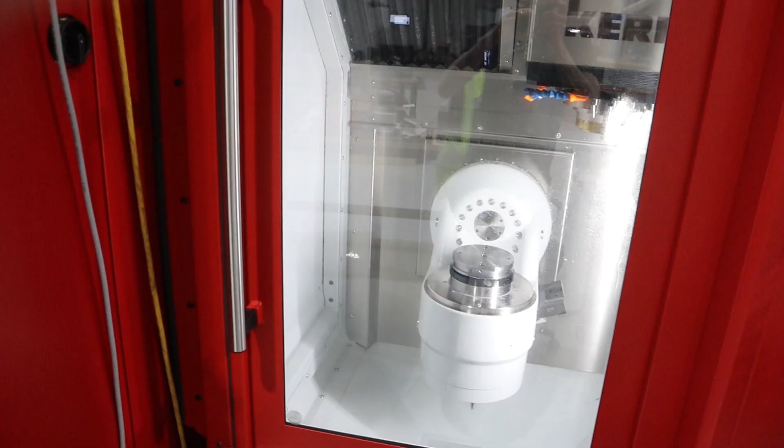So let's change the pallet. Got the one pallet on there. Got a whole bunch of pallets lined up in here. This pallet changer is a game changer, literally. It just changes the way that I think about work.

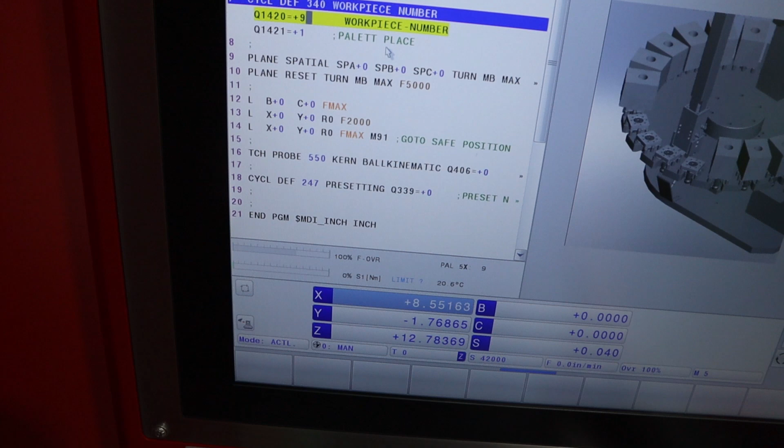So, okay, so I need pallet 12. This guy is pallet 9, but I don't really care what it is necessarily. So I'm gonna go here. I've already warmed up the machine. I'm gonna go workpiece number. I'm gonna push over, push 12 and end. That's it. And then cycle start. Double check. Okay, it is pallet 12 that I want. And then cycle start.

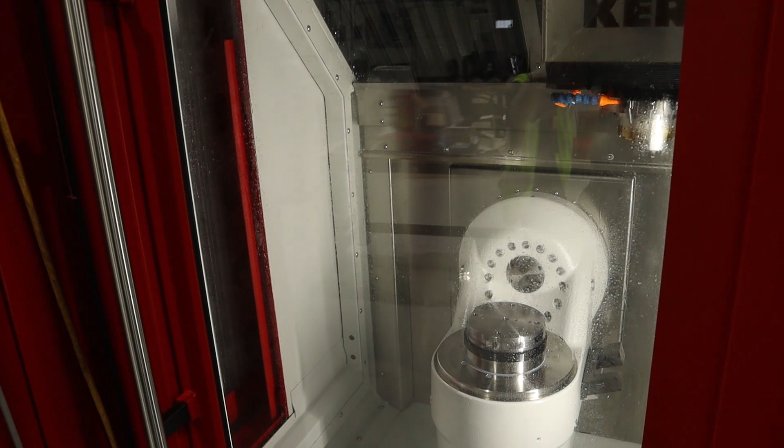So I've already homed and warmed up the machine. I've homed the robot. Oh, it's so gentle. I love it. Notice the air that comes up out of there. Here we go. Oh yeah. Down one, yep. Gently grab that sucker.

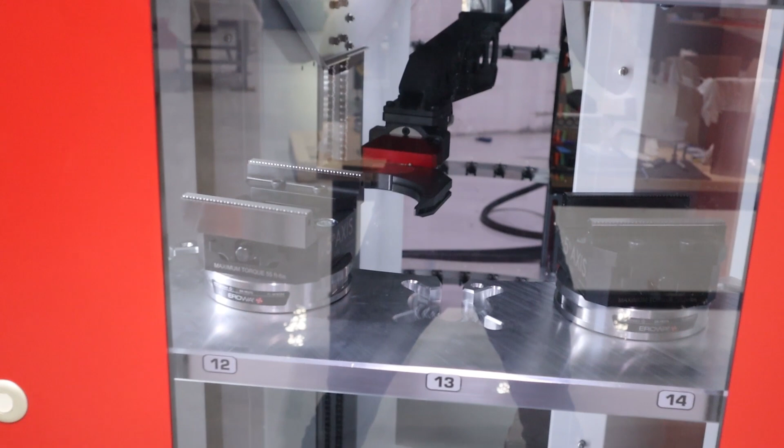There are little gripper fingers, I think, pretty sure, that actually pinch the pallet. Oh yeah. And there's a rubber seal around the outside, that black underneath. And then the door closes and the C will orient forward. And then I know we're done. And I can open the door.

All right. So now we're gonna grab that same pallet. I'm gonna open the pallet door. What did we say it was, 9? So now I need two hands for this, but I'm gonna grab it, lift it upside down, and put it in that vise.

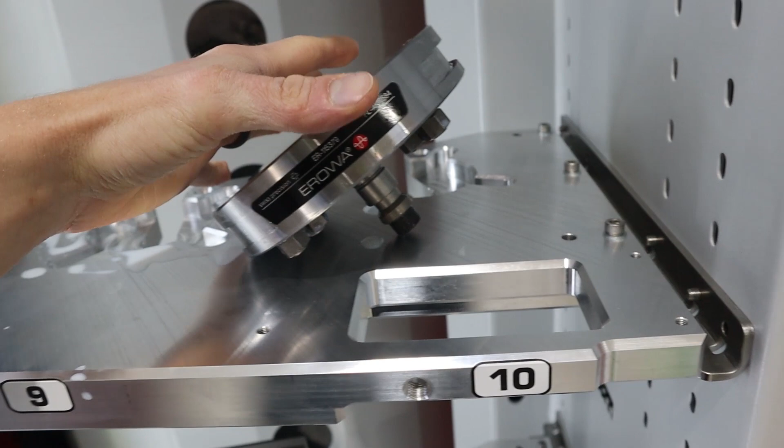So I just noticed something interesting as I lifted it up. A decent amount of coolant dripped out, just because it's in there. So I'm curious how clean this is going to be after lots of production. I mean, it's very accessible, I can clean it, I can get in there. We could spray it down and wipe it often. I'm curious how nasty it's going to get over time.

So we've got to watch that. Like, if this one drips, it's going to drip onto the one below it. Just things to think about. Maybe it's not a big deal, but something I noticed. I mean, it's been spotlessly clean this entire time, so I'm starting to see this.

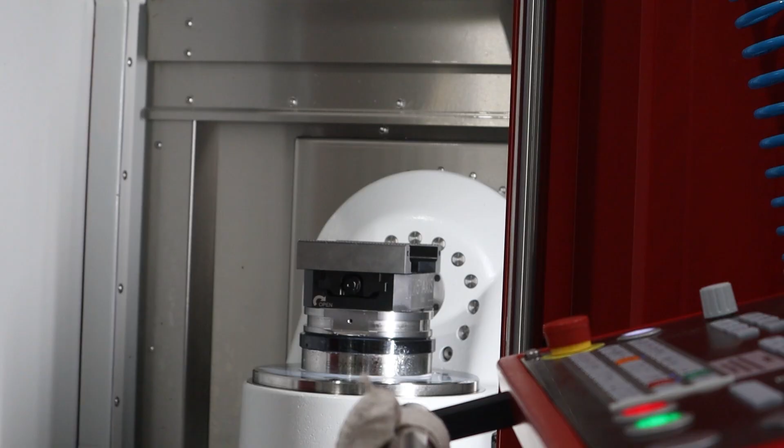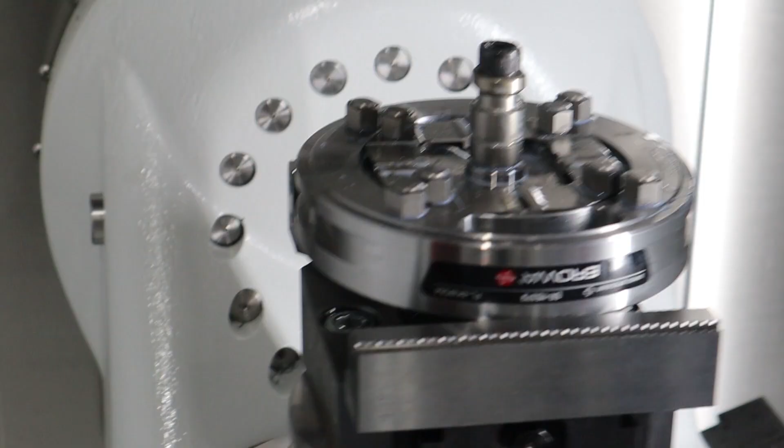So it's not tight yet, but that's kind of what I'm thinking. I was going to mount it lower on the cap head screws, but I was feeling weird about that because there's no way they're all the same height, meaning the pallet is then going to be a little crooked. But then I realized I can do it on this shelf right here. Like you see on this side, there's a shelf with grippers. I can do it on this side, and I still have enough gripping room there.

And then on this side of the pallet, there's a flat. So this flat area kind of orients the pallet, makes sure that we're in the right orientation, the right rotation, and then I need to probe it because there's no way I'm going to be able to guess perfectly center left to right. So we'll come in, maybe pull out the pull stud, and then probe this boss or something. Or actually, we could probe the outside of the pallet. Maybe I'll just do that. But this has got to be out of the way anyway, I think, because well, I could probably clear it.

I'm doing a countersink there, and there, and there, and there. I don't know, we'll see. I should probably remove that, but I might not have to. You can see how much it's sticking up.

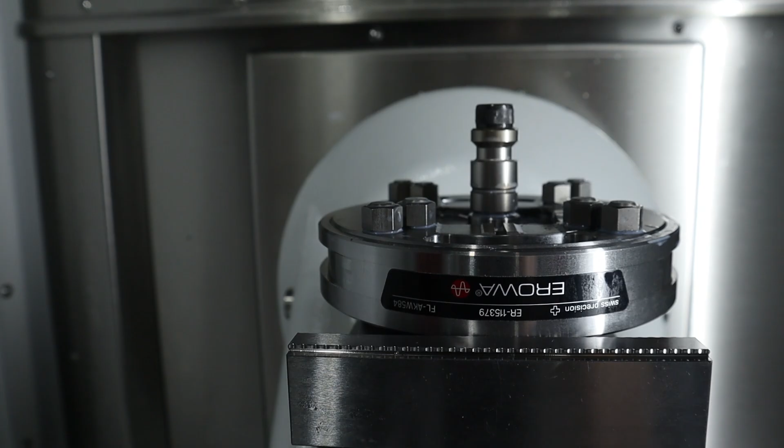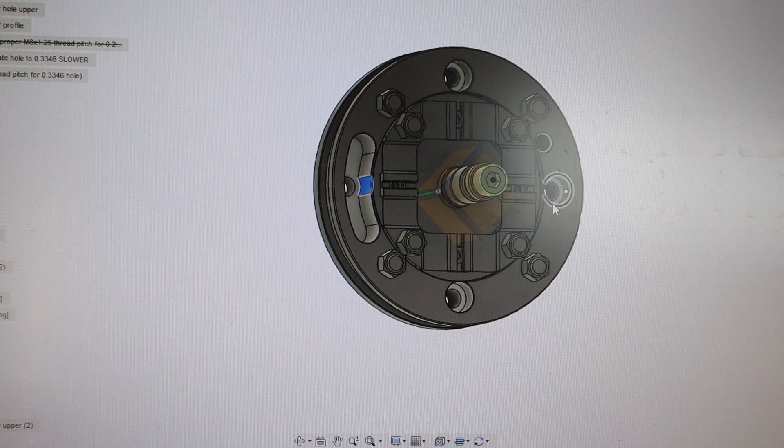So you can see here in Fusion what we're doing. We're putting in this guy. For those, the pallets have this weird arch thing. Maybe it's got a purpose, I don't know yet. But they all have that in it, so one of the heads is going to be shorter and go right there. But yeah, the other three. So real quick, check this out. Here's my setup, right?

According to the model, this chamfer will not allow the grippers to grip onto anything. You would never clamp like this because it's got nothing to bite into. But in real life, it actually works.

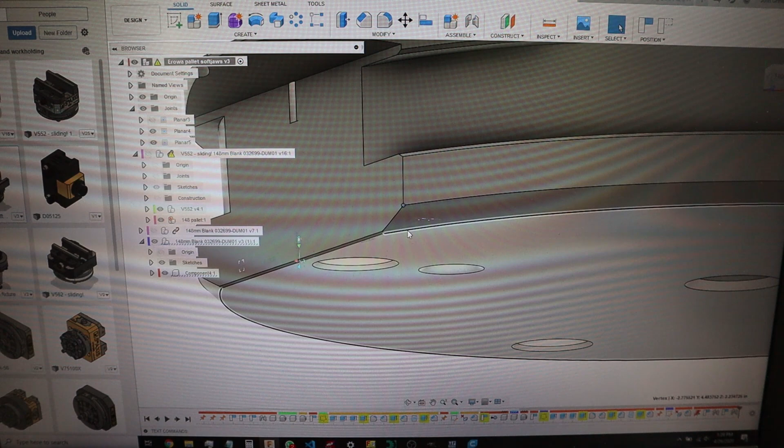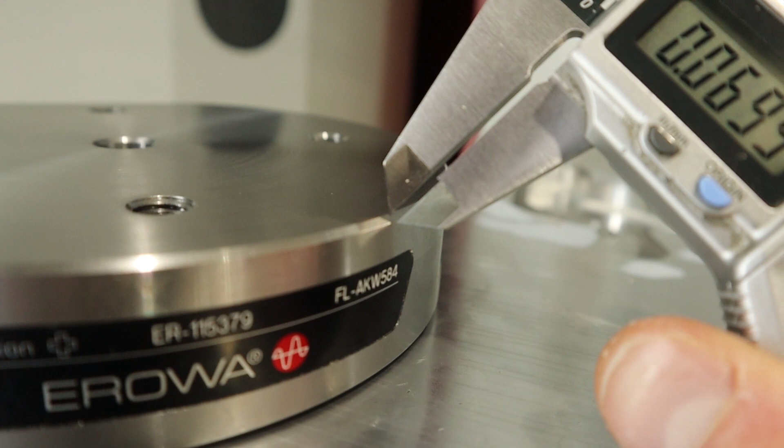If I hide that, and measure shift-click from the point to there, I get down here roughly 0.154 inches. So my chamfer across the angle is 0.154. However, when I look at my actual pallets and quick and dirty measure one of these - this isn't accurate, but I've got about 70 thou. So the actual chamfer is about half what the computer thinks it is.

That's interesting, so I'm going to actually look at this guy. This one has a big chamfer. I bet that one's even bigger. So the model that I downloaded is more like that one. However, if all the ones I'm using have this smaller chamfer, I've got to update my model to match, just so that it's right. Because otherwise I'll think an operation like I'm trying to do right now ain't gonna work, and I can't be thinking that, because it does work.

Much better, look at that. Yeah, that's exactly what I've got in real life. That'll grip perfectly. So I've got some joints set up.

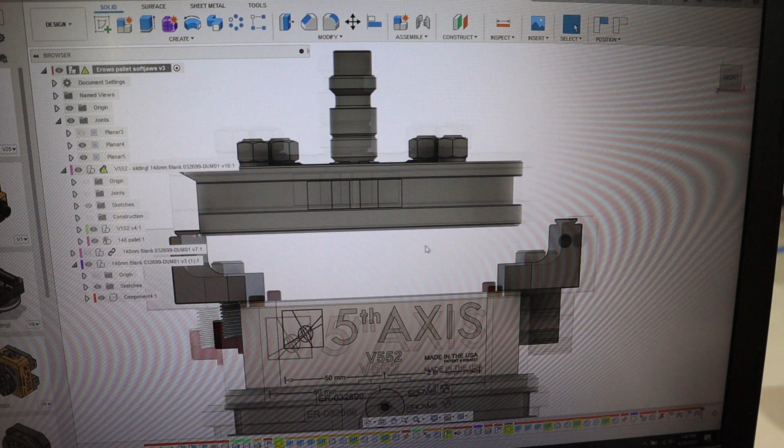I've been playing more with joints and trying to understand them better. So I've got some joints set up over here so that the model will track the flat side, you know, right there.

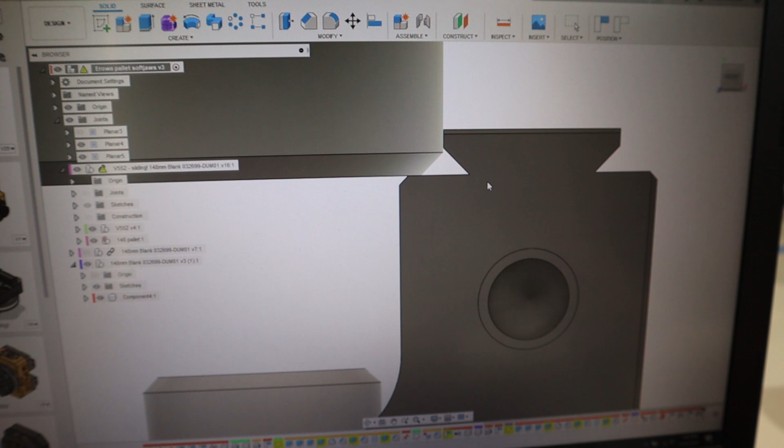And the vise is jointed together so that, normally the vise is like this, but you just kind of flip it that way. Then I just move it to position here, and if I want, I can lock it down or just not touch it. And I still have to move it this way. So I've got a few joints in different axes right now.

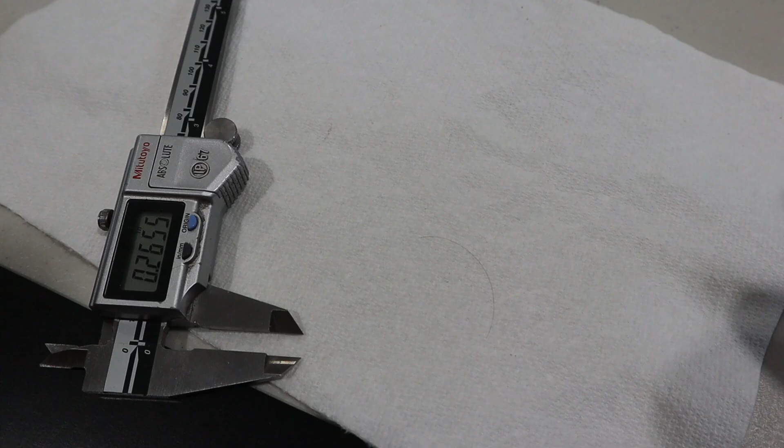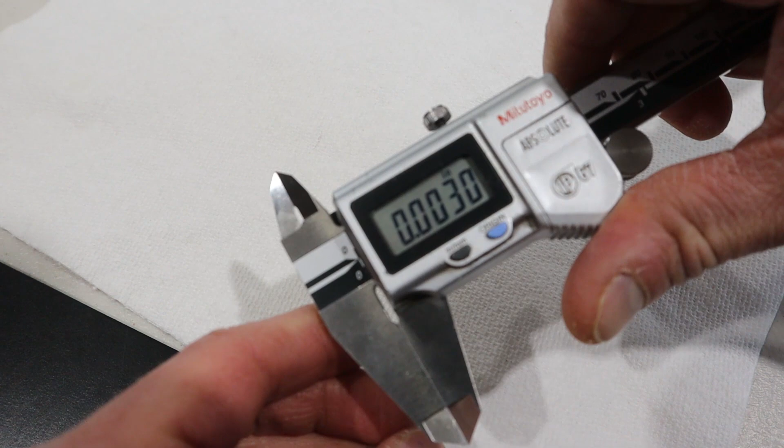Here's a goofy little side thing for you. I was just walking around the table here and I noticed one of my hairs on the table with the calipers literally right next to it. So instead of trying to pick up the hair, I just took the calipers and picked it up. And then I figured I'd show you guys how thick a human hair is, or at least my hair - 3 thou, 2.5 if I squish it a little harder.

So this is 3/1000ths of an inch, a hair, and the tolerances that we're working in are a lot smaller than that. So if my part is off - depending on the part, some parts are fine - but if some parts are off by a hair, by 3 thou, it's scrap, it's way garbage.

So that's that third digit. The first 0, then the second 0, then the third digit is a thou, or 3 thou in this case. And the fourth digit - this caliper only goes in half-thou increments, the 5s and 0s - but that fourth digit is typically what I measure a lot of critical stuff to, as a 1, not as a 0 or 5. So this doesn't even get that accurate.

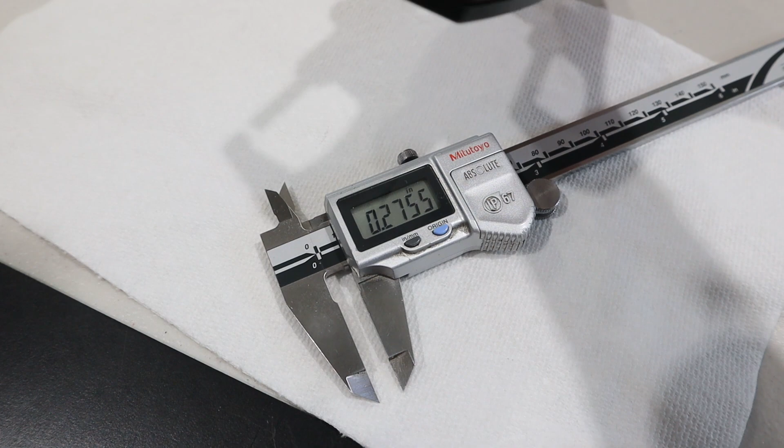Whereas a mic like this gives you an accurate fourth digit and then a 0 and a 5 fifth digit. So since we're doing it, use a Kern business card here - it's a little trick that Angelo taught me to clean the face of the calipers. Use a piece of paper, maybe not cardstock, but take this down to 0, good. Okay, where'd my hair go?

So let's more accurately measure this hair. I think it's in there. See, this gives me 2.6. 2.5 when I ratchet the thimble. So there you go, 2.5 of a thou.

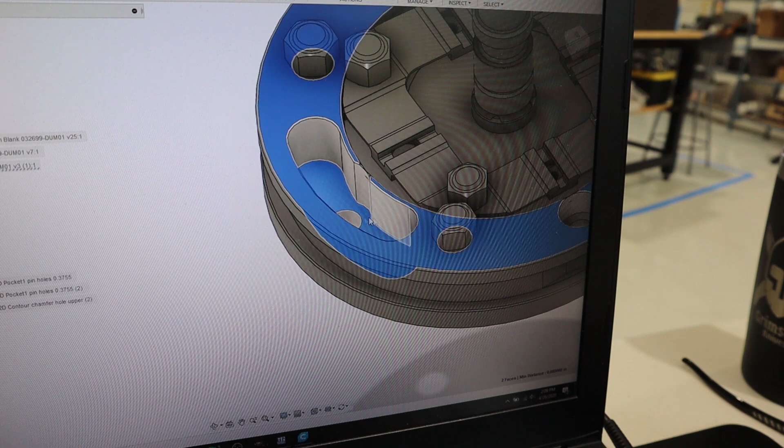So I've got a little baby dilemma here that I'm just trying to think through right now. Pocketing these holes is going to be no big deal because they're only 0.41 inches deep. That's fine, my flute length is 625. But this guy is 0.68 inches deep. The flutes on the tool that I have aren't that long, so I'm actually going to have to put a different tool in the machine just to pocket that little thing.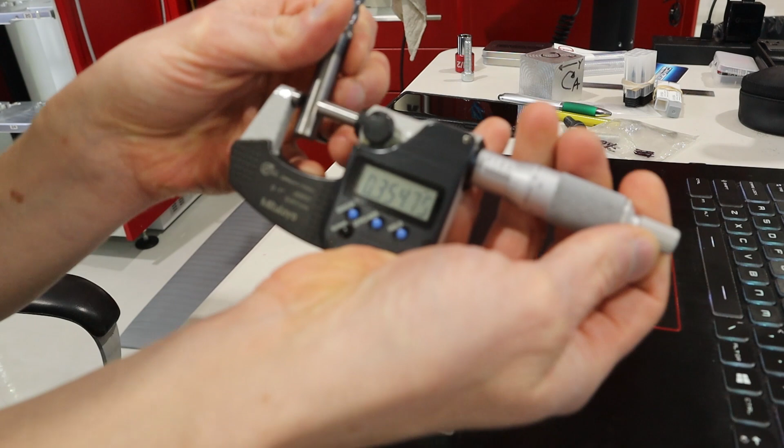So if I measure the shank diameter, I get 3.748.

Please focus. There we go.

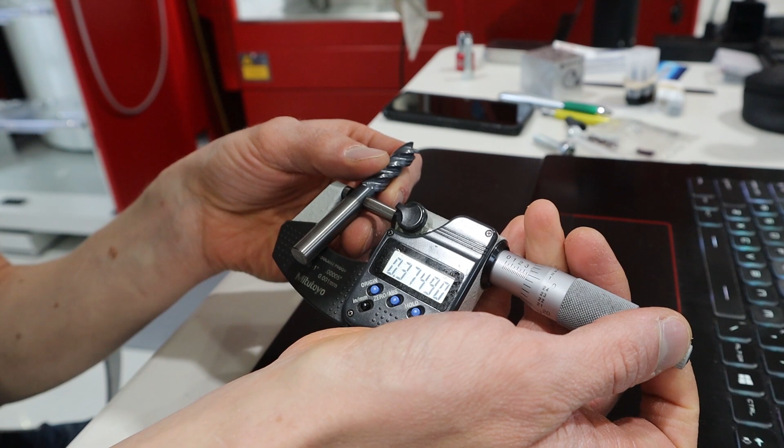3,748 on the bare carbide. On the coating, I get 3,749. So it's actually measuring - you know, they say the coating is almost nothing, but that's half a tenth per side. It is almost nothing, but it's something.

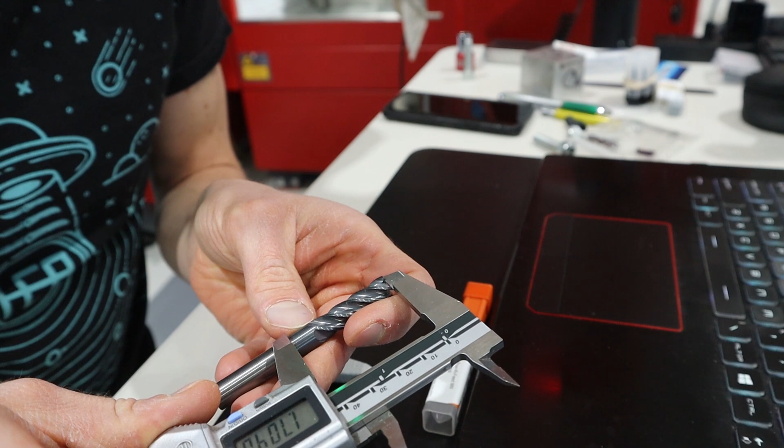Theoretically you don't want to clamp on that, so I'm probably going to heed that warning and just clamp right up to there. It'll give me a little bit more reach for the future. It's a big enough tool that the extra stick out's not going to make a big deal. So I got to figure out how much stick out I need. I can get away with 1.7.

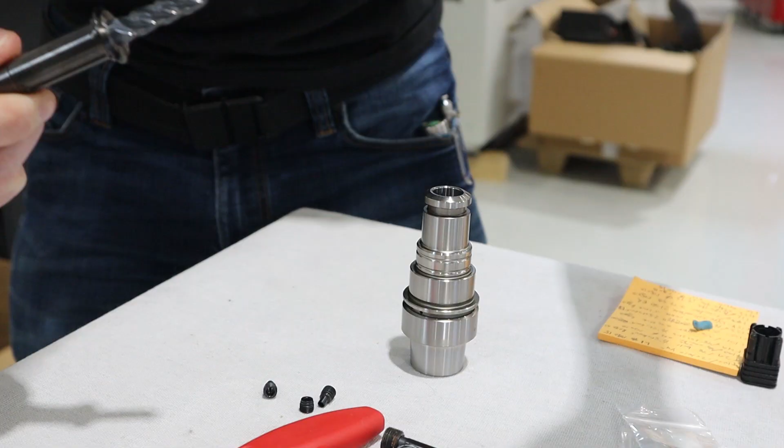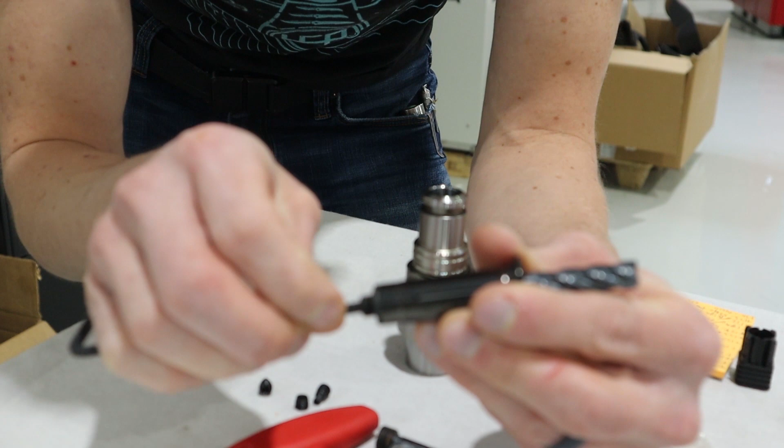In previous videos, these are the PG collets that we've been showing for a while now. A lot of you guys were mentioning that it's weird how I use the blue sticky tack to keep the tool at the right height where I want it. Well, they do come with little set screws on the bottom. I just don't typically like them. They don't always work for me.

Even this one here, when threaded all the way in, I want the tool to stick out more than the set screw allows for. Apparently they make longer ones and shorter ones - I just don't have them. I have whatever came with the tools, and I've been pulling out most of them. Also, when I use a double-ended end mill, which I sometimes like to do, you don't want the other good side resting on the set screw. So I'm fine with my method for now.

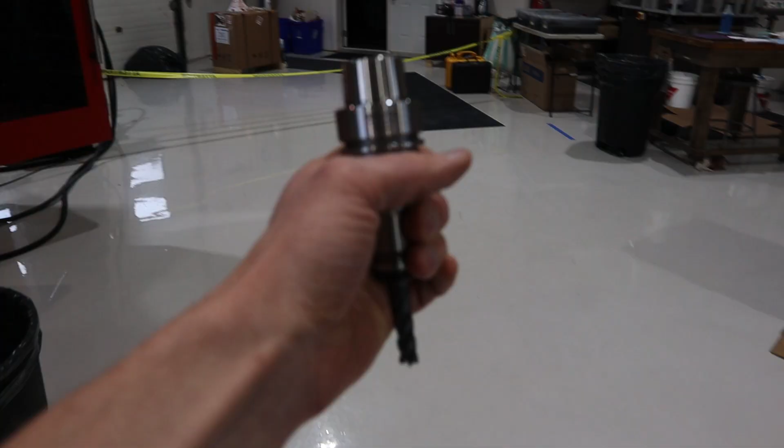This is totally a two-handed operation, not one hand with the camera. Ta-da! 58 - it's the magic number.

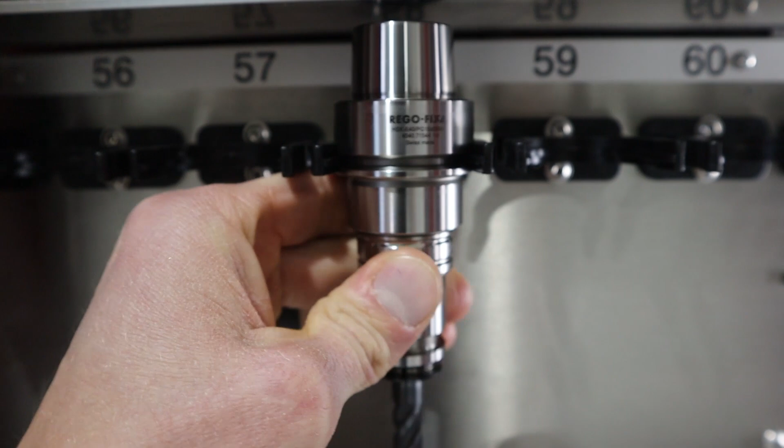Make sure the Rego-Fix is lined up, pointing straight, not off to the side, just for consistency. So you can see I can still fit quite a bit longer tool, like an inch longer, before maxing it out.

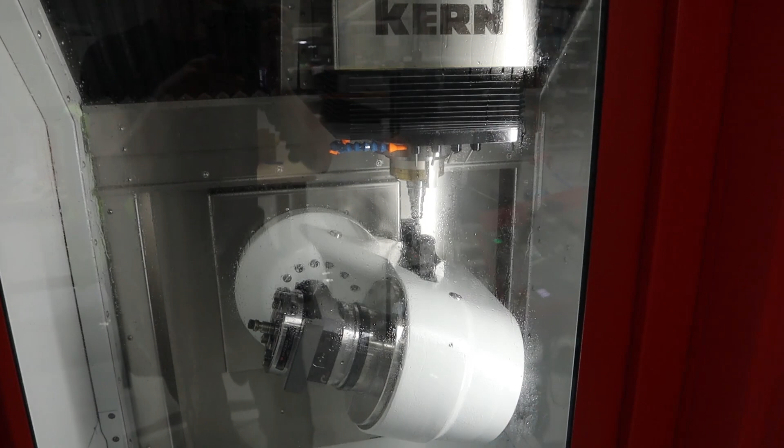Trying to get rid of that glare. Oh, there we go, put my hand in front of the door. I just like seeing there it is, the red laser beam on that side. I think it's cool.

Alright, so here we've got the Blum touch probe mounted in the spindle, and I've got a touch probing routine that I think is going to go around the circle 4 times - 1, 2, 3, 4, automatically. I told it it's a roughly 6-inch diameter circle with a lot of clearances, and I'm going to slowly see what this is going to do.

Touching the first side, lifting up. Good, I gave it a 3-inch clearance upwards. That should be good.

Oh, it just missed - it was so much clearance that it timed out basically, it couldn't get close enough. Let's try it again. I started from the back position, now I'm going up, moving over to 9 o'clock. Perfect. Moving over to 6 o'clock. Beauty. And I don't have to have it go up so high, but I wanted to clear that post just in case. Beautiful.

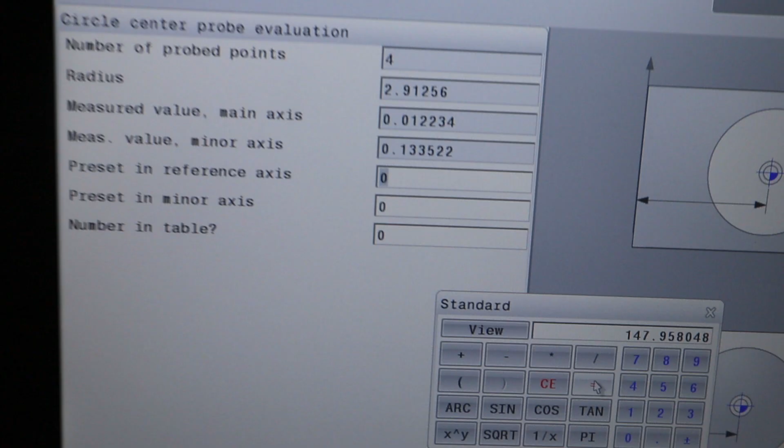So that measured a circle radius of 2.91 inches, which converted to metric is 147.96 millimeters, and it's supposed to be a 148 millimeter pallet. So it's almost exactly a 148 millimeter pallet, which is sweet.

All right, finally got my toolpaths ready. Jumping into CAMplete here, we have the Kern model, which is so cool. I can hide the enclosure so I can see just what's going on here. Okay, everything looks good - I got my vise, I got my stock the right way, the flat being in the back.

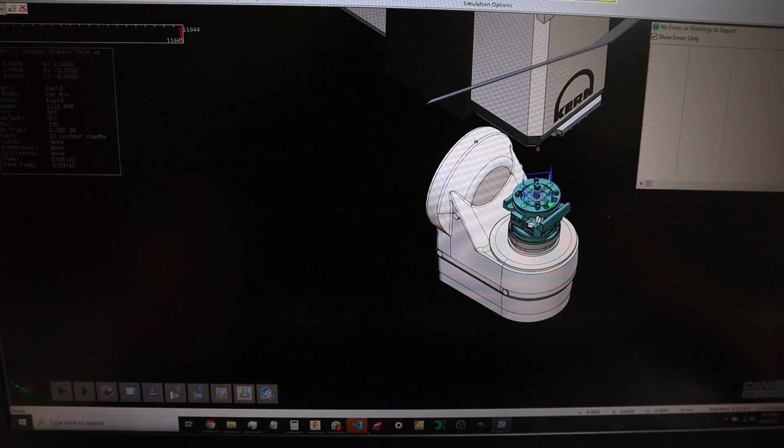And I'm confirming my toolpaths to make sure that they clear that post in the middle. So you can see they go around in all ways, and CAMplete simulates without any issues. Beauty.

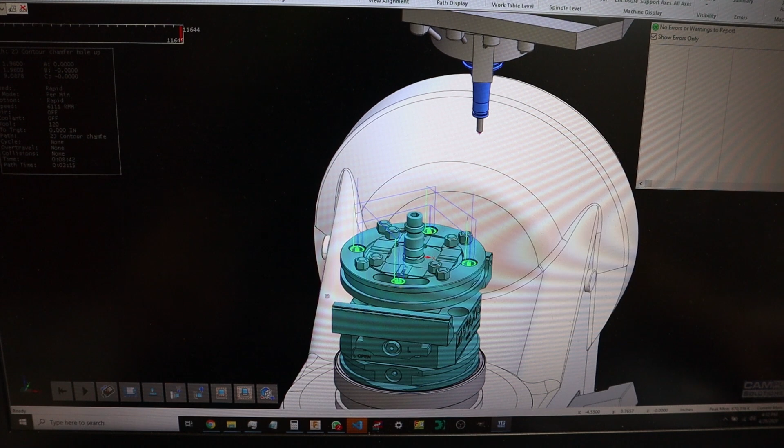Working with CAMplete's been awesome. Like, the service guys - spent some time on the phone with them, got everything dialed to the way my vise goes on there, to the way the tool changes and lines up the taper properly like it should be. And yeah, I'm getting the workflow of this really, really dialed now.

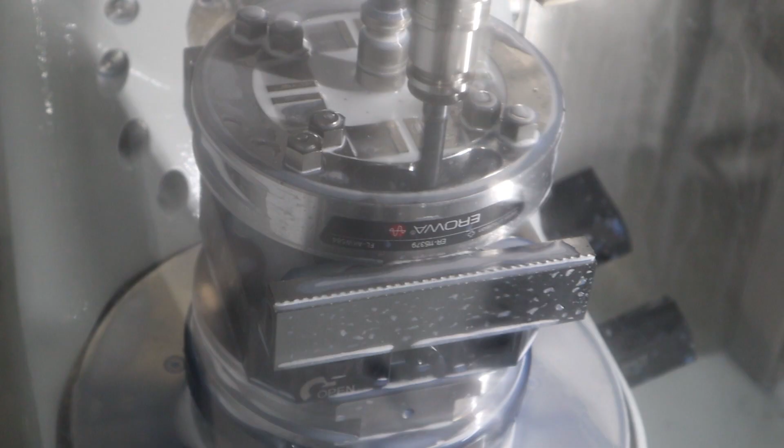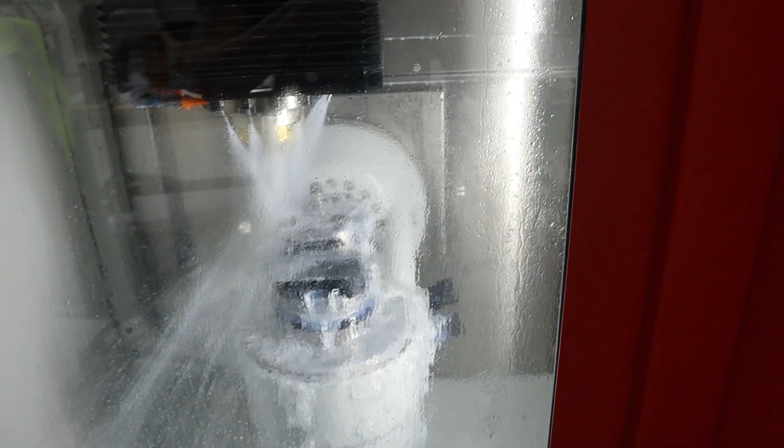Here's a fun fact for you. The vise is not supported, I'm on the 9 o'clock position, there's nothing underneath it, right? So the pallet's actually vibrating, making a gross noise. It's actually not so bad now, it was really gross in the beginning. Makes sense, there's no support under it, and it's not held very well elsewhere. It's not going anywhere, but it's jiggling, just ever so slightly.

Making custom soft jaws to hold it properly would have been probably worth the investment, but this works.

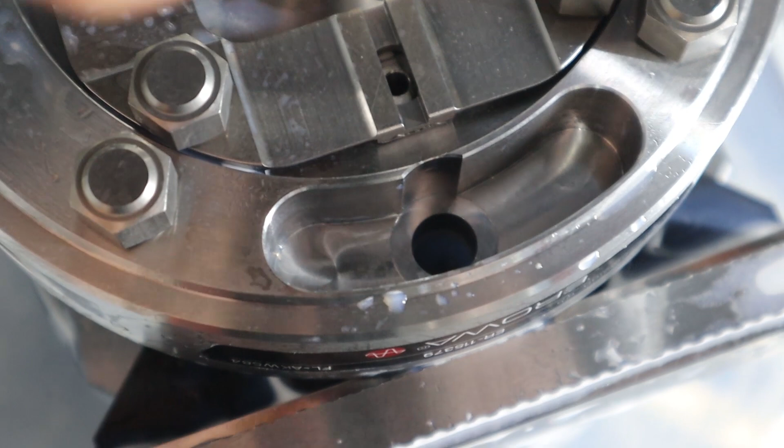Oh, baby, baby, baby. We have 4 holes with, look at that beautiful shiny chamfer on the outside. Oh, I love it. Love it, love it, love it. Look at that one.

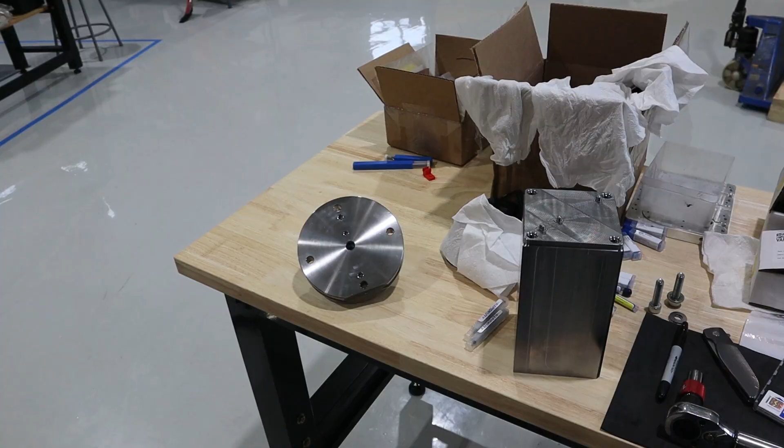Therefore, this pallet's done. That means that guy and that guy can be put together. I was worried about this. You see right there?

The grippy jaws kicked up a burr where they gripped into the material. I wondered if that would happen. I kind of figured it would. So that's okay, that's what my PFG stones are for.

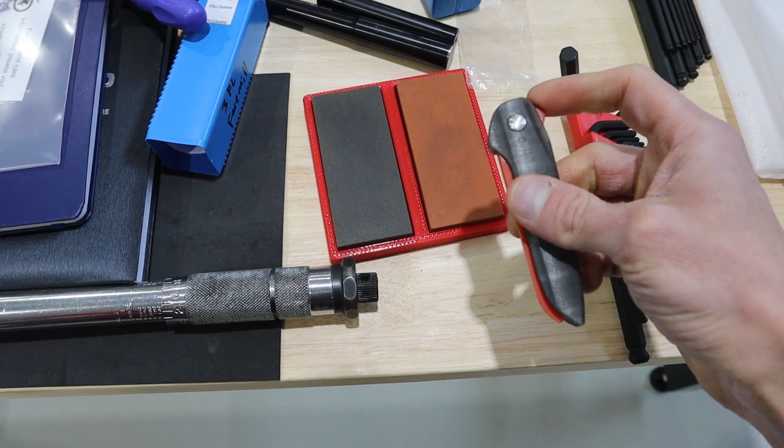Oh, what's this, you ask? Remember the 2012 video of the integral? Well, this is the 3D printed version of it. And with the help of this, it will see the light of day eventually.

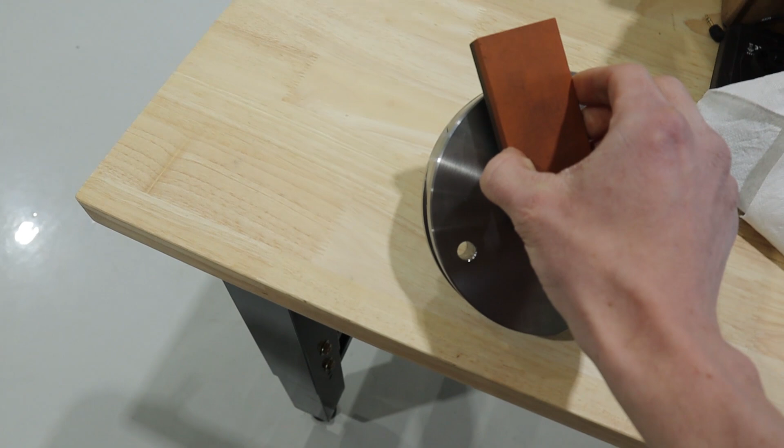Eventually. So, clean our stones off, and I need 2 hands to do this well, but I'll get that burr down, no problem.

Yeah, it's working pretty good. Kinetic precision makes a good stone, you guys. Huh, that is exactly what these stones are for. When you have a flat surface and there's a scratch or a scuff or a burr or a nick or something, that's what these are for. It's working.

Let's try the upside down taste test here. Ever so slight wiggle, I can just feel it moving on those pins, rotating, like barely.

I hit it yesterday in the last video, I hit it a couple times trying to make those holes perfect, and I think I went just a few tenths oversized.

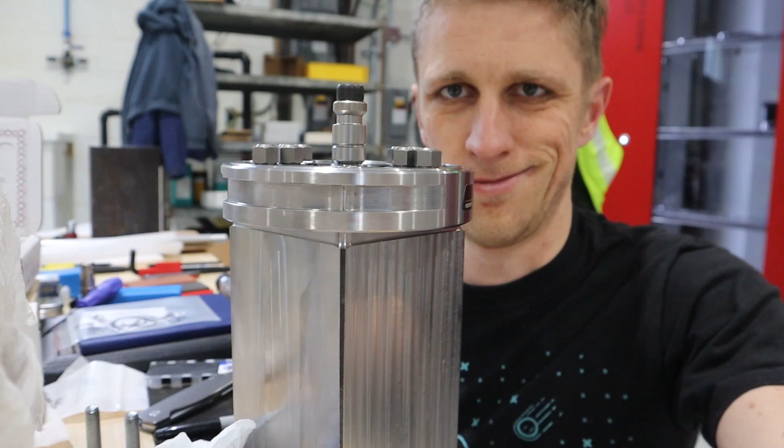But it's fine, like I'm totally over pickying this. For all intents and purposes, these two are probably never going to come apart. But if they do, and if I were having a surface where this was coming apart multiple times, I'd probably design it a little bit different anyway.

But it was an excellent experiment for making super precision holes and pins, and it took a little bit of tweaking, which was neat to see. Skill, you know, gotta learn that skill. Okay, let's bolt them together, man. Figure out a torque spec for an M10 bolt so that I can use my torque wrench, torque her down.

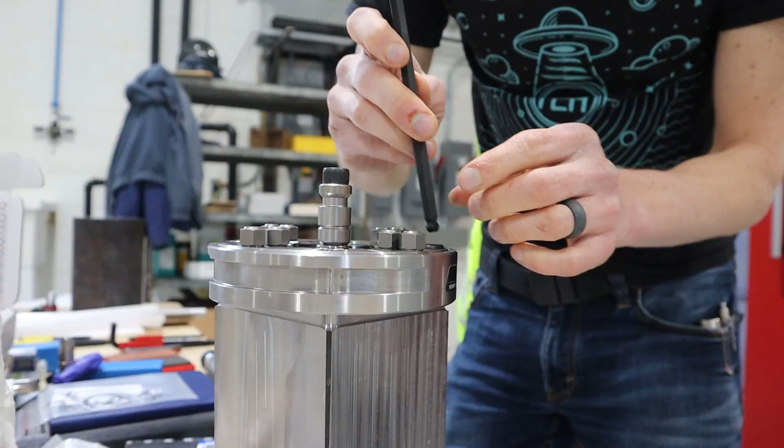In case you guys are wondering, I've been meaning to talk about this guy. So for years, I've been married for 10 plus years, and always wore a gold wedding ring, and everybody's always like, ah, you can't wear a gold wedding ring, you can't wear a wedding ring in the machine shop, you're gonna get your hand sucked into a lathe or something. Very possible, it's true, I've sort of been breaking the rules doing that.

But anyway, just a few months ago, my wife got me a silicone wedding ring, and it's rubber. Pretty sweet, and they're cheap, like 20 bucks or something. Usually they come in a 3-pack, but this one came by itself. So, theory is, if you're in a working, moving machine, especially a manual lathe, and you get your finger caught on the chuck, if this was a metal ring and it sucks you in, you could lose a finger, a hand, an arm, a life, etc. It's a real possibility. Whereas with the silicone it'll just rip, and you'll be like, oh, okay, that sucked, but $20 later you got a new one and you keep your fingers. So I really, really like it, not just from a safety standpoint. It's comfortable, it's lighter than it was before, and I just like it. It's cool.

I just remembered something trying to bolt these in. The bolts that I have are all 5mm too long because I was planning on using M8, which I bought a box of, but then I screwed up the threads a couple videos ago, so I had to go up to M10. The only M10s that I have are all 5mm too long.

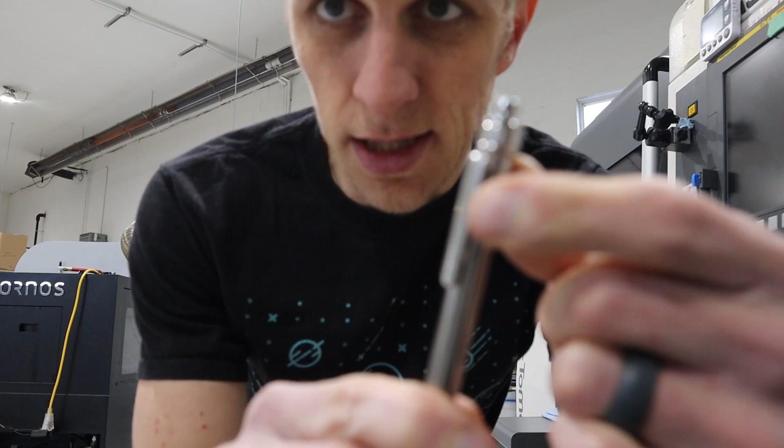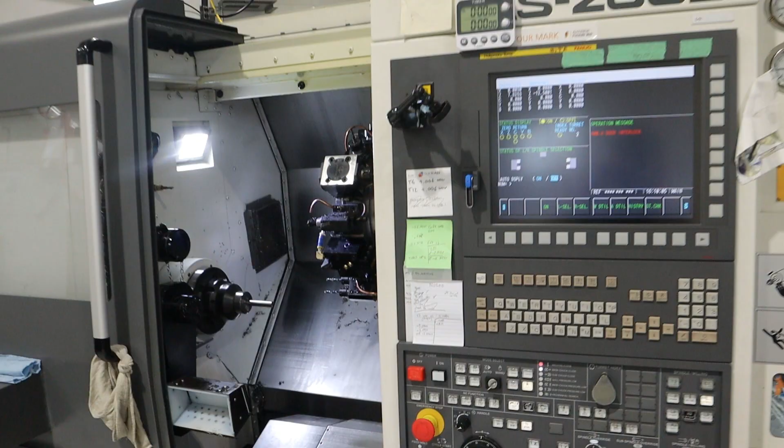But it's pretty fast to set it up, turn it on, throw one collet in, and then the bolts can go through the back, stick out the front. I can quickly touch off the face and just cut off 5mm. Shouldn't take too long. I thought about going at the grinder or bandsaw or something, but I'm like, let's use technology, I'm gonna use this as a manual lathe. If I had a manual lathe, I would be doing that, but we don't, so we have an expensive CNC machine that we're gonna use manually. So let's give you a look inside the Nakamura AS200 LMYS.

So this is a turret lathe, much different than the Swiss lathe right there. The turret rotates around and presents all kinds of different tools. Like we got some drill bits down there, we got a threading tool, OD and ID, we got a live tool here. This is a spinning end mill type tool.

Live tool sticking radially, this is axially. Back in the back you got 2 boring bars sticking off each side. All kinds of fun stuff.

We got a main collet, a sub collet. So it makes your part here, blah, blah, blah, and then the sub collet comes in, grabs it, cuts it off, and then brings it back here and lets it finish work on this side. Really sweet setup. So anyway, I'm just gonna hit this pedal.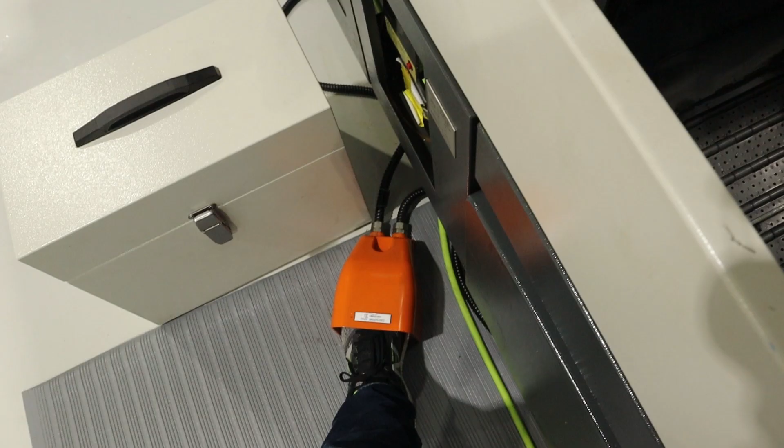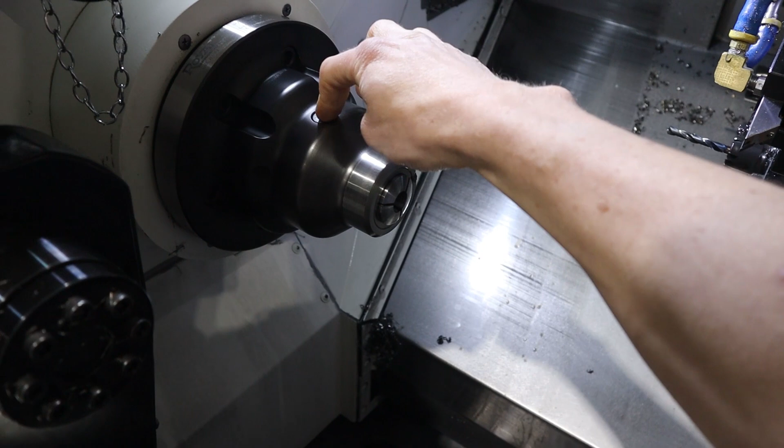That opens up the collet. I'm gonna pull out this bar of material, give it a little shake. Put it right there for now. I'm gonna loosen this screw, pull out this collet, put the other collet back in, and we're ready to rock.

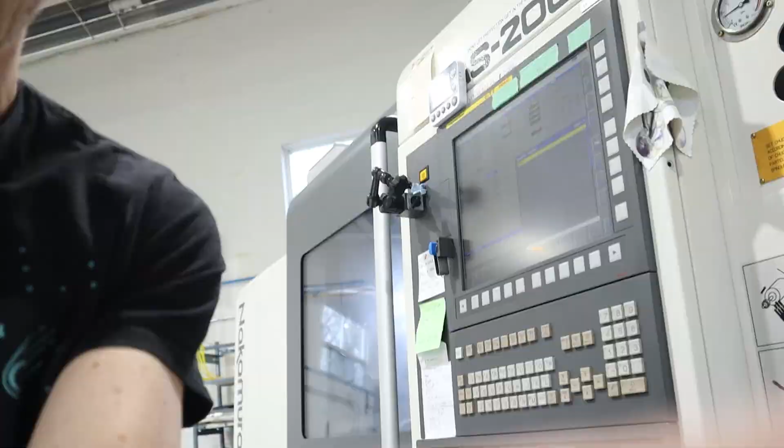It's neat. I haven't used this machine in quite a long time, and I've been so into the Swiss lately and into the Kern and doing Mori stuff too, each machine is different. Each machine has its own little quirks and features, and this one's got an M471 that you got to type in before you can move the Y-axis.

It's come back to me, but it's been months and months since I've personally used this machine. Angelo's been running it by himself for a long time, which is great. But yeah, it's like riding a bike. You get back into it, and you're like, oh yeah, I remember that now. Okay, yeah.

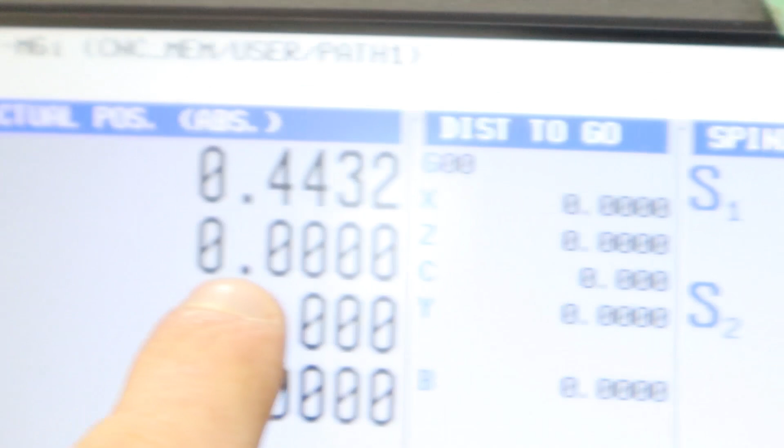So let's take a closer look. I've jogged the axis down, I'm spinning it manually. I've got my double stack of tools there with one of them right up to the part. I've zeroed the Z axis to be the new face of that part, so I just got to go whatever 5mm is in inches inwards. I think it's 0.196.

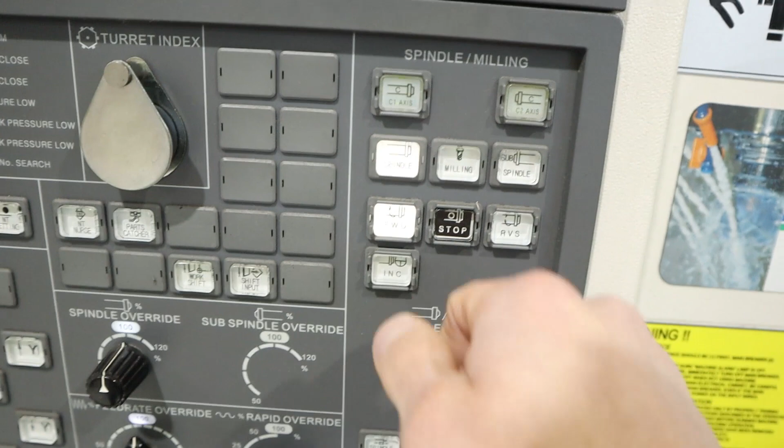Anyway, spindle forward, this is my RPM. And then I'm just jogging the X-axis, making my cut. Doing this manually.

Maybe I can set up the camera here. Well, that's not so bad. There's a glare. All right, that's the best you're gonna get. There we go. Manual focus, stay there. That's good. Okay.

See that brass coolant line right at the very top, top left of the screen. I gotta be careful, I don't crash that into the spindle.

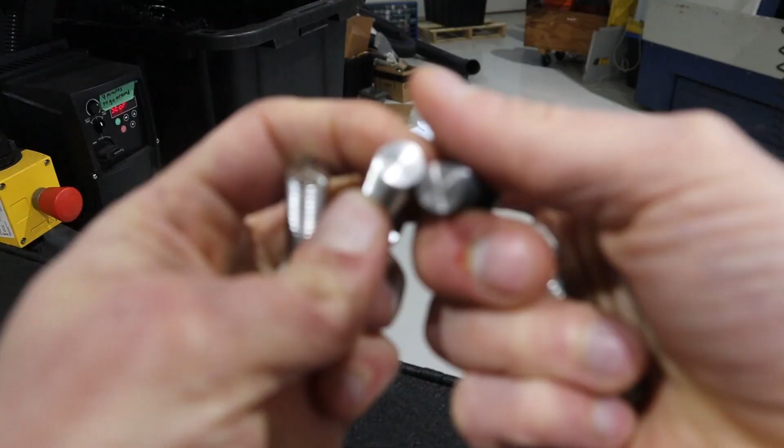So the only downside to having the screw go in the back side of the collet is now I gotta pull the collet out for every screw. But no big deal. Come on. Ta-da! Just gonna run to the grinder real quick, put a quick chamfer on it, 45 degree around the outside. And then we're good to go.

So like with anything, there's many different ways to accomplish a certain task. Using the Nakamura to shorten these screws, probably not the easiest or fastest way. I mean, shoving them into the grinder would have shortened them after a little bit of time, although that grinder's really underpowered. But I could have walked over to Eric's shop and shoved it into a big 2x72 grinder with a 60 grit belt or something. Could have done that, didn't want to. Wanted to use the lathe, my baby. I haven't used that thing in a long time, so that was fun. They look really good, they look awesome with the chamfer.

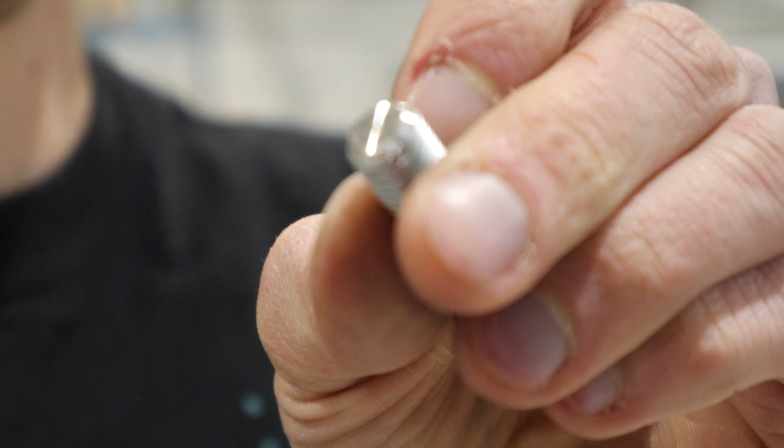And let's put this thing together. Oh, still a manual focus. That's better. Hope that last scene was in focus.

Right, you may be wondering why there's one black one and 3 silver ones. Because of the design of this, that oval pocket that I have right here, I need one shorter screw to go down.

I'm gonna blow these off after grinding them, actually. All right, that one goes in there. Nice. 2, 3, 4. Little bit of a burr from that grinding up.

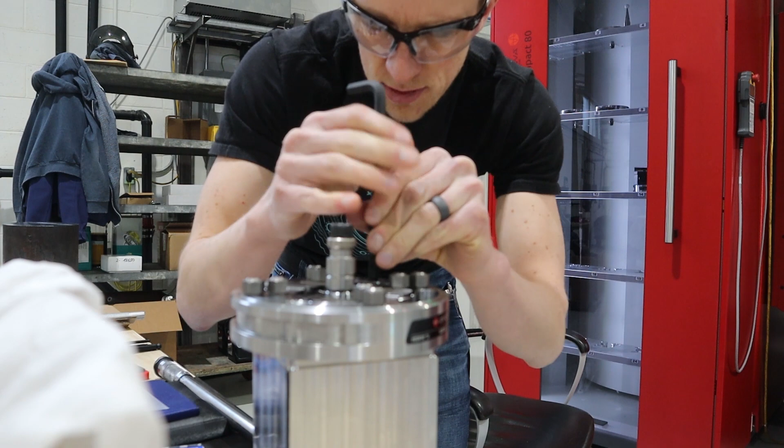Right. Sweet, now I can torque them down and we're good to go.